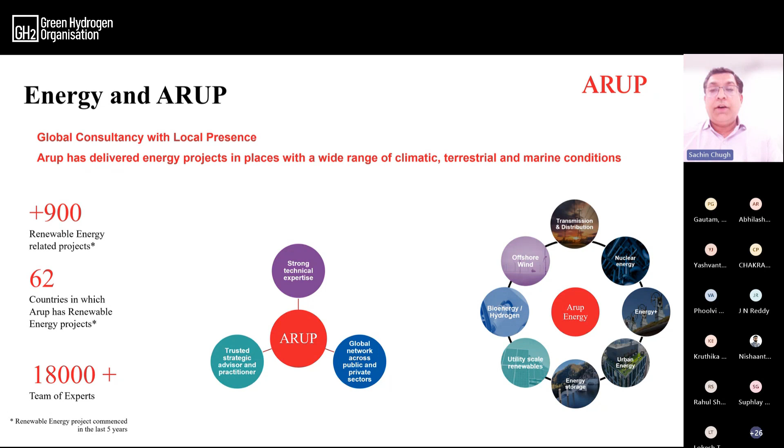If you see the entire value chain, we are into the entire spectrum of energy, not only hydrogen but other forms of distribution, including offshore wind, transmission and distribution, nuclear, and whatnot. So we are here in India to start a fresh chapter, which is going to pave the way for most of the things you are going to see and witness in the hydrogen economy.

Now, coming on to the topic, I'll be covering a few fundamentals before driving on to the engineering aspects of hydrogen. There are some properties of hydrogen which all of us have already been discussing at various forums, and I would not dwell upon these properties per se because they have been talked about a lot.

But just for a minor reference, the density of hydrogen is about 7% of water when it is in liquid form, and about 7% of air when it is in gaseous form. The energy density per se is about 2.4 times that of methane, and when we compare it in liquid form, or volumetric energy density, it's about 2.9 kilowatt hour per meter cube, which calls for a lot of compression or liquefaction if we have to transport it over longer distances.

Flame speed, particularly when we talk of the combustion of hydrogen, is 6 times more than methane. It has its pluses as well as demerits. The ignition energy is very low, therefore it requires a very small source of ignition to actually catch fire, but the flammability limits are so wide that the safety threats actually belong to hydrogen, and those have to be properly addressed.

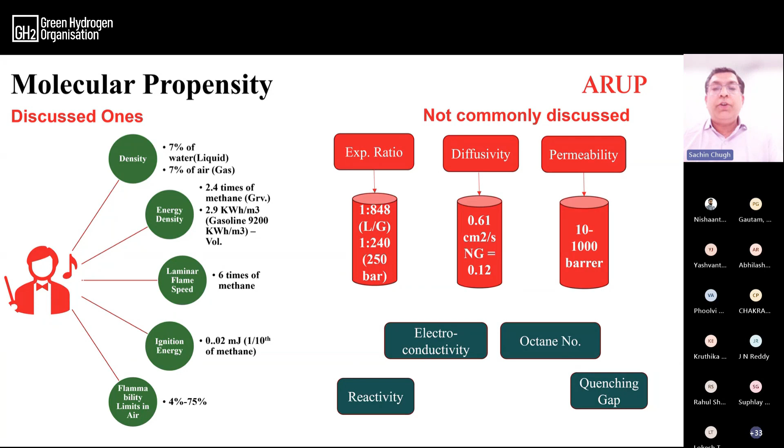It also calls for a limited range. So when handling the colorless and odorless gas like hydrogen, the role of sensors becomes very important. But the distance between the leakage point and the sensors can suffer because of this lower quenching gap, so it becomes imperative that the right planning is done before selecting spaces to install flame sensors for hydrogen systems.

So if I come to the landscape of green hydrogen production technology, electrolyzers are one of the preferred choices, and we are all fully aware of the technologies prevalent in the market - be it alkaline electrolyzers, which are the old horses as far as hydrogen production is concerned. People indicate that they have lower upfront cost, do not need any critical raw materials, and per se are quite reliable.

But yes, there are certain disadvantages, like they are not flexible in terms of load following, and they have a limited output pressure, and therefore if the end application calls for building up of pressure or storage of hydrogen, then there might be certain problems.

The PEM electrolyzers are not new in the market, but the kind of scales we are looking forward to in the industry, earlier PEM electrolyzers were not designed for those scales. But they do come up with certain advantages, like higher output pressures, and great flexibility for load following. That's where, when targeting applications other than industrial ones, like automotives, these electrolyzers are going to add much more value compared to other counterparts.

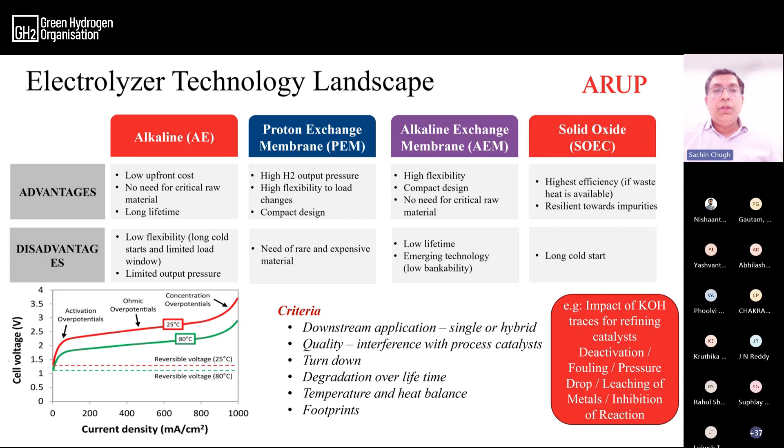Each of these technologies operate at different current densities. Therefore, the constraints in terms of availability of space are also one of the factors in how these technologies are chosen. So the choice of electrolyzer technology actually varies based on the load variation, the end process application, whether mobility is an integrated part of the complete value chain or not, the purification levels required, the degradation, and the cost.

High temperature electrolyzers are said to consume lower amounts of energy, because in this graph, the more you raise the temperature, the lower the electrical energy that's consumed in order to split the water molecule. However, higher temperature electrolyzers also call for heat demand, and if this heat is not available in the form of waste heat, then the comparison can be redrawn, so it becomes very important what the end application is.

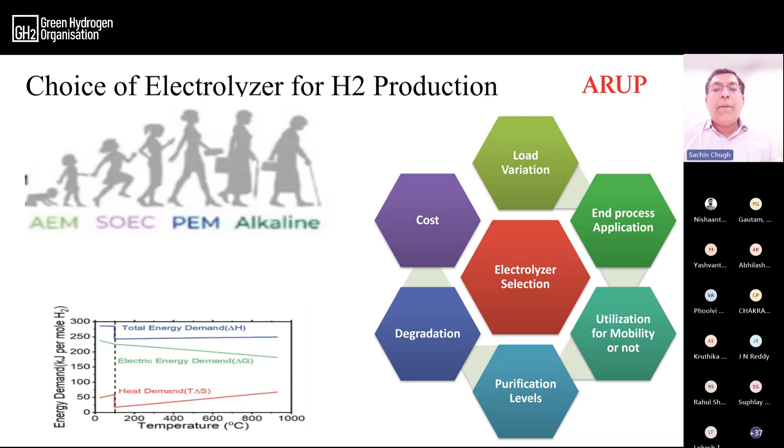So per se, the total energy consumption, which includes both electrical and thermal energy, a solid oxide electrolyzer generally consumes less total energy compared to a PEM electrolyzer. However, the higher temperature operation of solid oxide electrolyzers allows them to use thermal energy effectively, thus reducing electrical energy requirements and improving overall efficiencies.

Now coming to a deeper topic of water. I know it has been touched a lot, but when we go for the process engineering or design of hydrogen plants, we tend to ignore one side of the complete narrative, and that's what I call the water-energy nexus. The water is required to produce energy, and particularly for generating this energy, water is required. And to produce that water you require energy, because water is not available in the form in which it's required.

So when we deep dive into the complete narrative as a feedstock into the electrolysis process, this is one dimension, where water is directly converted into hydrogen and oxygen gas. The second form is as a cooling fluid to remove the heat generated in the process. When we talk of electrolyzer efficiencies, around 70-75%, the remaining energy has to be withdrawn from the process, and that's where the cooling fluid becomes very important. There are various mechanisms for this cooling - evaporative cooling is one method, but there are alternatives such as air cooling that could also be used.

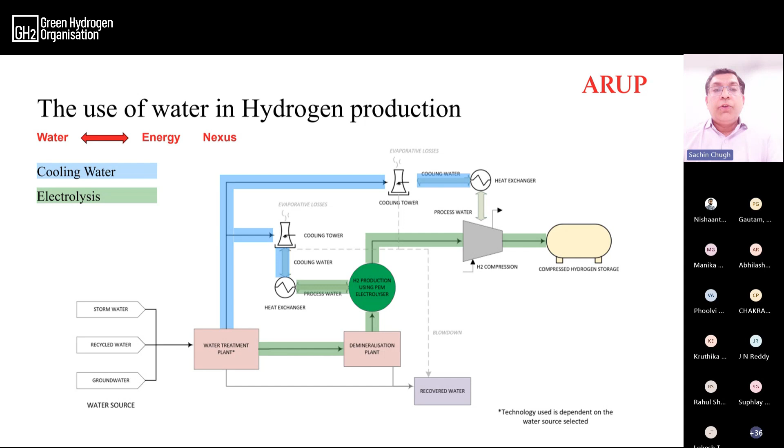And while we are talking about the policies around the world, we are not considering the additional requirements, which might cause several constraints and change the complete dynamics of project investments, resulting in under-designing the water systems. Later on, during the life cycle or operation of the plant, we may end up requiring more water because of cell degradation. And if incorrectly designed, the plant would definitely operate, but the durability is going to suffer. So this is where proper engineering design becomes very important.

Now the question is, how much water does hydrogen actually need? Water requirements are highly variable, so we cannot have a pinpoint rule that 1 kg of hydrogen would require about 9 to 10 liters of water. When analyzing the entire hydrogen value chain, we have to understand the source quality of water, the treatment method, the climatic conditions under which electrolyzers are installed, the hydrogen production method, which electrolyzer we're going to use, the cooling method, and the hydrogen carrier conversion process in case we're translating or deriving derivatives of hydrogen, like ammonia and so on.

The main consideration has to come from the cooling water requirements, so there are multiple methods. In this particular study, we assessed three different cooling methods: once-through cooling, evaporative cooling, and air cooling, and saw that each may be suited to certain locations and climatic conditions.

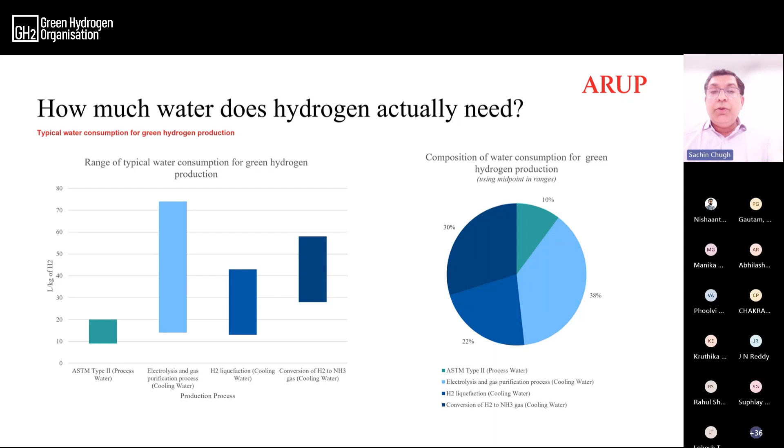Another aspect which is missing is the load not considered due to cell degradation over a period of time. So how much is that? Probably we can discuss in the coming slides.

Continuing our discussion, if we see the requirements as far as the process is concerned, the variation in the quality of the water can also affect how much groundwater would be required. This particular study is not customized for India, but we did it for Australia, and you can see on the graph that it depends upon the source of water, and therefore the energy spent on purification or desalination of water. The actual volume of water required would depend upon the raw water quality.

Water sources such as seawater require a lot of treatment, and a lot of water is actually rejected as waste. Depending upon various kinds of requirements, a minimum of about 23 liters to about 94 liters of raw water would be required.

In India particularly, if mandates come for the refining sector or the fertilizer sector as far as green hydrogen is concerned, many setups we are talking of are going to be in landlocked areas. I am assuming that hydrogen transportation is not going to happen; we are going to generate and consume hydrogen at the same location. So with so many constraints around the withdrawal of groundwater, are we thinking of transporting hydrogen from the coast, which is not a viable option, or transporting desalinated water towards hydrogen plants inside the landlocked production centers? That is a question which maybe the industry needs to answer.

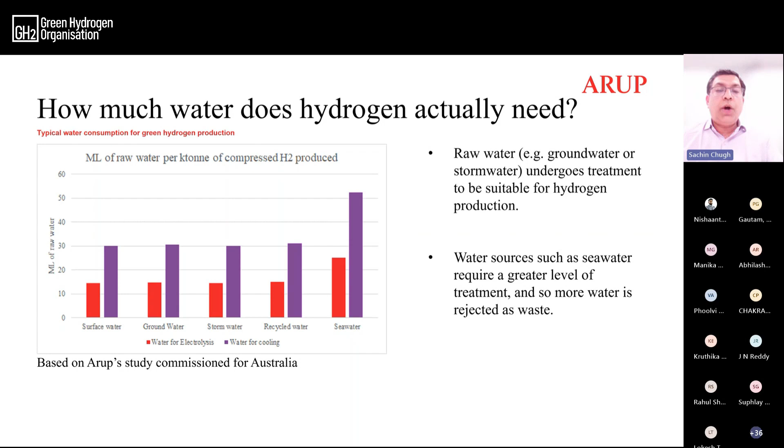Now, technologies are available, but again, what is the application? What is the cost? These are the things, and what is the durability of the complete system? These are the things we need to understand before we embark upon any such solution.

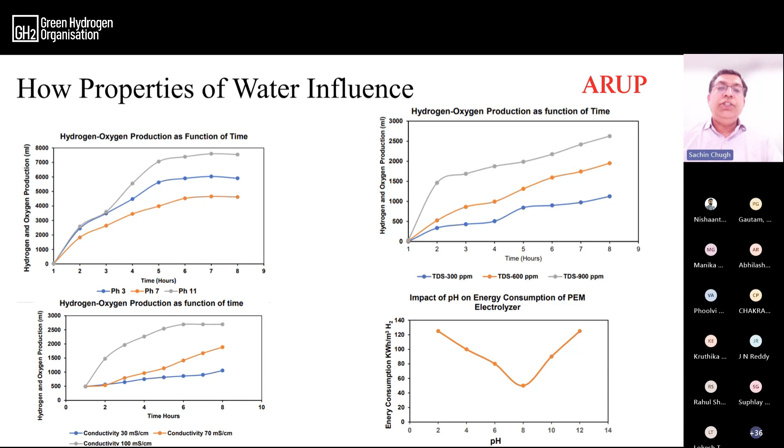How the properties vary, I'll not go into detail, but the pH levels, the TDS levels, or the conductivity all influence the durability of the electrolyzer, the efficiency of hydrogen generation, over the time span. Therefore, what appears to be correct at this stage as far as selection is concerned may not show as many favorable results at a longer date. Therefore, the right kind of interventions are needed when we are designing the complete plant.

Now, when I talk of the emission intensity, particularly how much emissions are generated out of hydrogen production, we compared multiple pathways, but I'll only be sticking to the green energy or green hydrogen pathways. When we see biomass coming into the picture, because of the net negative CO2 cycle, it appears that biomass is more favorable as far as emissions are concerned.

By the way, when you are looking at around 17.6 kg of CO2 being emitted by solar electrolysis, this particular emission intensity is based on well-to-tank kind of studies, which does take into account the mining of materials required for the solar panels, and therefore a lot of emissions are getting generated for that particular process.

But coming back to the topic, when we are considering biomass as one of the potential sources for green hydrogen, we have to see and negate the double accounting, which probably can be done because all of us are considering that biomass is going to absorb that particular CO2, or would have absorbed that CO2 during its life cycle. But when we are talking of some kind of bindings on us as far as the creation of CO2 sink is concerned, we would have accounted for those emissions at an earlier date.

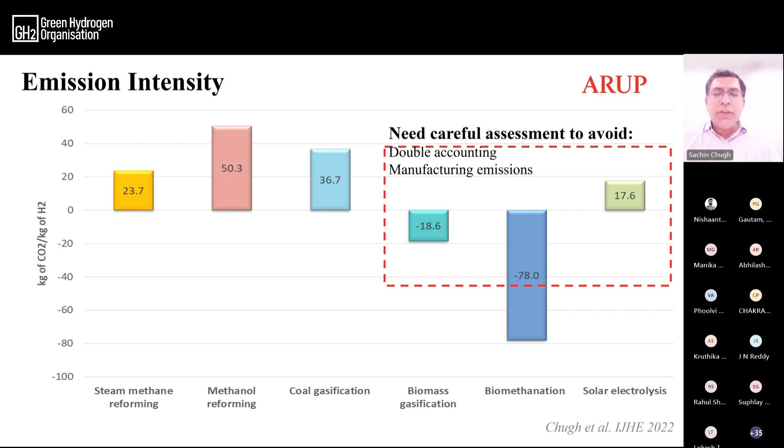And the second thing, like I discussed, the manufacturing emissions related to the production of solar panels or the mining of the material need to be considered in order to arrive at some realistic numbers.

Apart from these emissions, there are some unintended emissions, which we call fugitive emissions. Per se, these emissions have now become very familiar, very common in discussion forums, especially when we are talking of methane emissions. But I wanted to highlight a word of caution here: as far as the hydrogen industry is concerned, are we moving towards the methane way?

And why I am touching this topic is because, irrespective of any production technology revolving around green hydrogen, particularly pertaining to electrolyzers, there are cycles of venting during startup and shutdown of the electrolyzer systems. This is because they are designed to prevent the buildup of an explosive mixture of hydrogen and oxygen, as we are aware that the lower explosive limit of hydrogen in oxygen is about 4%, as we discussed earlier. And to provide a factor of safety, the hydrogen concentration is driven down to less than 25% of this limit.

So this means that at startup, any air within the cathode side of the system is vented, which is shown in this particular figure. Now, similarly, this cycle is followed during the shutdown also, just to avoid any kind of safety threats.

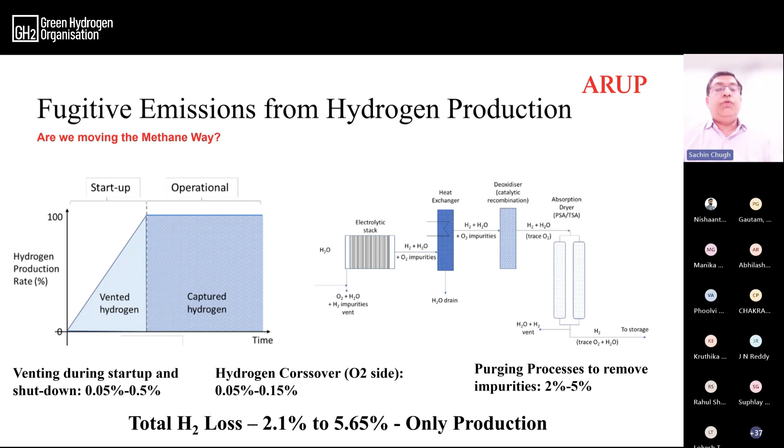So per se, if I combine these three aspects, the total hydrogen loss can range from somewhere around 2% to about 5.5% of the total value. And like I said earlier, the number may look large when we are thinking of tons and tons of hydrogen for the industry.

Coming on to the CO2 standard, which most countries are now in the process of setting — some have already done so — India also has embarked upon this, and we are right here. As per this particular standard recommended, not more than 2 kgs of CO2 per kg of hydrogen is allowed, which can qualify the so-called produced hydrogen as green hydrogen.

Now, when we back calculate this, this means considering the combination of grid electricity as well as renewable energy, this calls for about 95% renewable energy and 5% grid.

But when we see the dedicated plants, this might be possible considering the fact that there is a wide variation between the generation capacities of the plant and the installed capacities of the renewable energy. This particular number may be looked at as a little bit ambitious.

While at 2 kg we are allowed about 5% of the grid, if we increase this number to about 3 kgs of CO2 - and this is only the production number - most countries have gone with well-to-wheel numbers, which are a little bit higher than this. It makes sense to include other aspects of the hydrogen value chain, particularly when we are talking of transportation of hydrogen for export purposes.

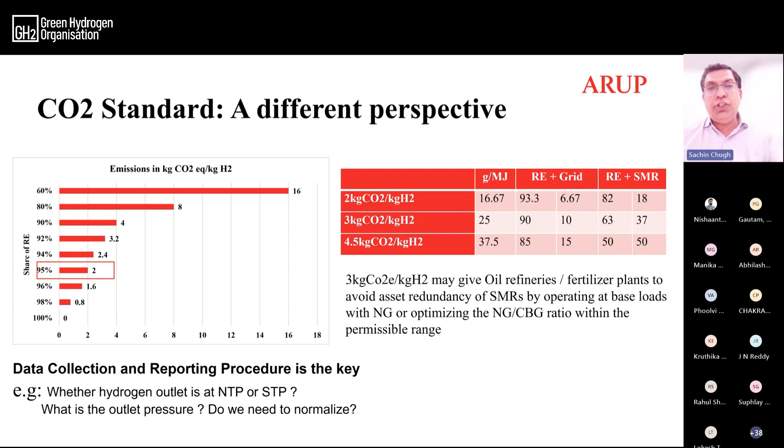There are a couple of things we need to target, and clarifications might be required on whether this hydrogen outlet is at normal temperature and pressure conditions, or standard pressure conditions. What is the outlet pressure? Because the CO2 emissions are going to change with respect to the outlet pressure of hydrogen.

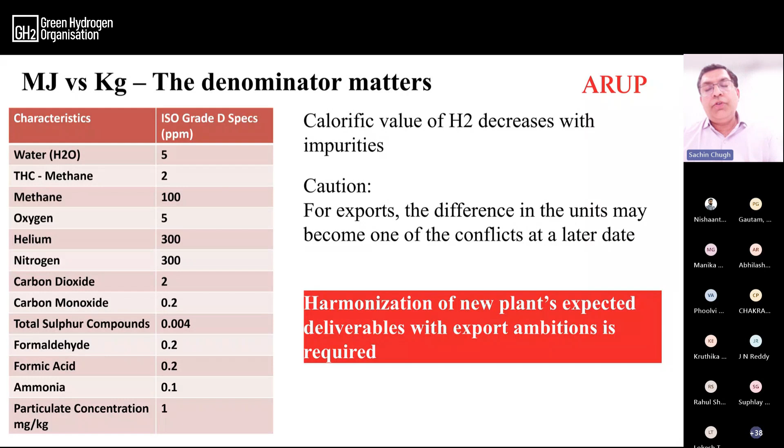So that's why I call it a comparison between megajoules and kilograms - what should be in the denominator? Because the calorific value of hydrogen decreases with impurities, and therefore we have to be a little cautious in terms of exports, because differences in the units which other countries are following may become one of the conflicts at a later stage.

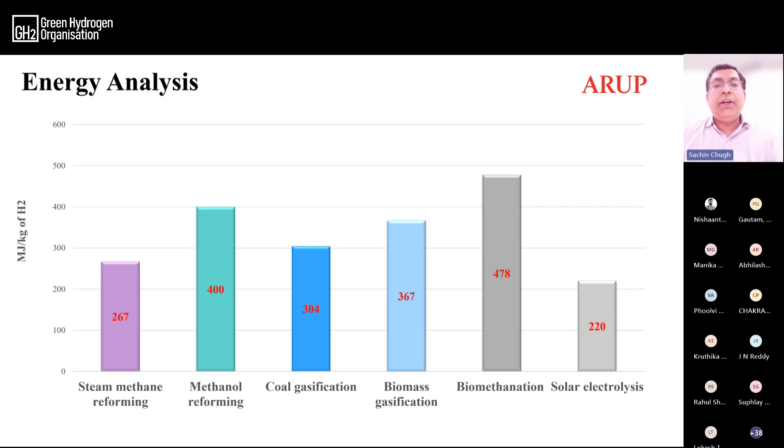As far as energy is concerned, we can see that the green hydrogen pathways are going to be very near to the blue ones or the gray ones, and therefore we need to see how seamlessly we can provide the energy to the complete system.

In a nutshell, if I dive down into the complete hydrogen value chain, we can try to analyze various criteria based on what sites are available for the production of hydrogen, the characteristics of renewable hydrogen systems, what is the correlation between the electrolyzers and the power plant and the battery energy storage systems and their parameters. Therefore, we need to apply multi-criteria analysis and then prepare the cost tool and decide the best possible algorithm.

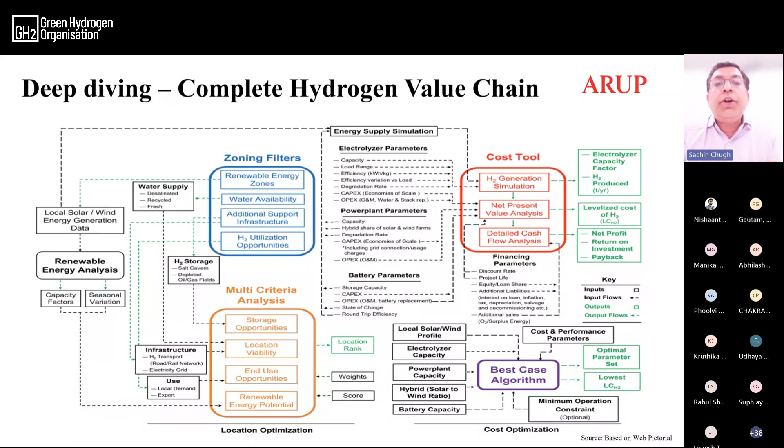And these are the kind of services, or the kind of analysis, which would be required in order to arrive at the right numbers as far as the least cost of hydrogen is concerned.

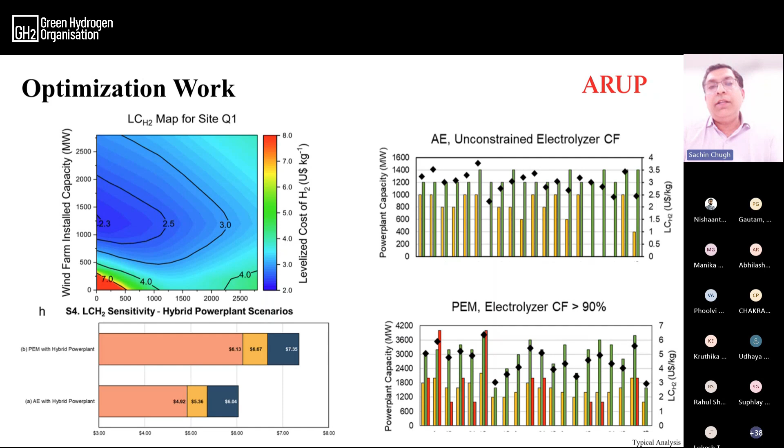Now, if we further detail the optimization work, we have multiple sources of renewable energy. There are capacity factors associated with the electrolyzers, and there can be different types of electrolyzers. So we can have different sets of numbers coming from different sets of criteria, and this analysis becomes very important, particularly considering the experience of other parts of the globe, which we can leverage while deciding the hydrogen plants for India.

Meeting the ends - again, if the call is for production of derivatives like ammonia, we are talking of two complex systems coming together and integrating themselves. So this interfacing actually induces the variabilities which are there in the RE system and the downstream molecule production.

So therefore, dynamic models - not static ones - for process optimization over a lifetime are required to arrive at the right numbers. The customized model for stack durability, balance of plant design, and system efficiency are required.

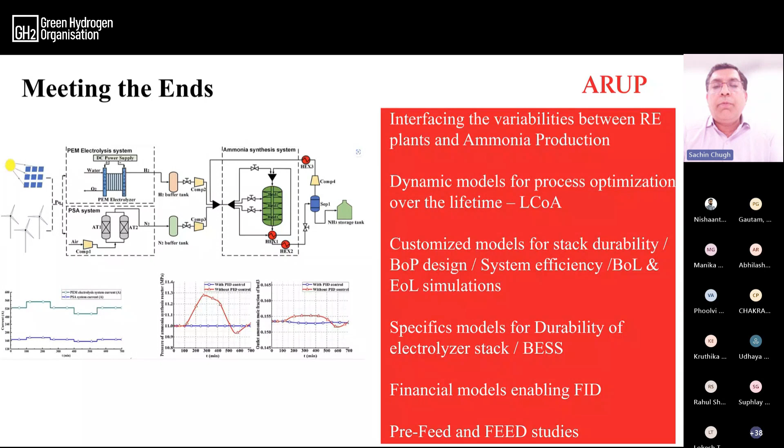The beginning-of-life performance of the cells and the end-of-life performance of the cells are going to be hugely different. These kinds of criteria should be there, and specific models of durability of the electrolyzer stack and the battery energy systems are required, which can lead us to the right FID numbers, making the financial decisions, followed by the pre-feed and feed studies.

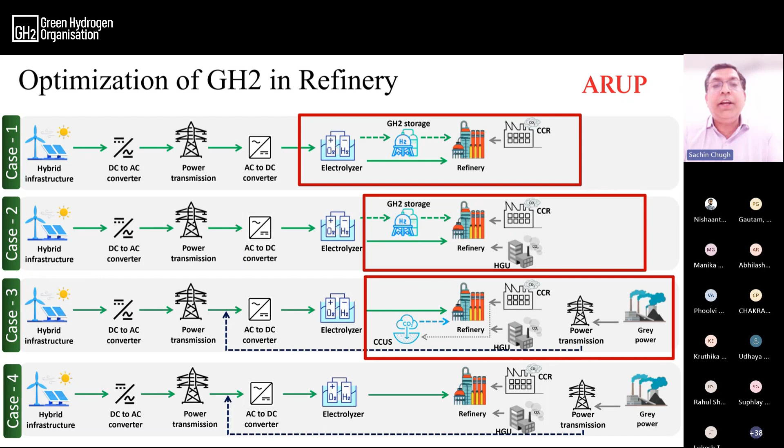So particularly in refinery, I talk of multiple cases, multiple scenarios. Those have to be properly understood when we are targeting the integration of green hydrogen in the refinery, and see how the process optimization can take place, as far as the resource optimization can also take place, leading us to the least cost of hydrogen.

So in a nutshell, some of the risk factors which are automatically associated with the hydrogen plant include water purification and management, the variations around those things. They constitute the technical risks, the power management, the variation in the performance of the electrolyzer stacks, thermal management, and the gas processing.

Combined, all these risks are going to have a lot of impact on the final project cost, and therefore some judicious decisions are to be taken with the right kind of discussions and consultancies.

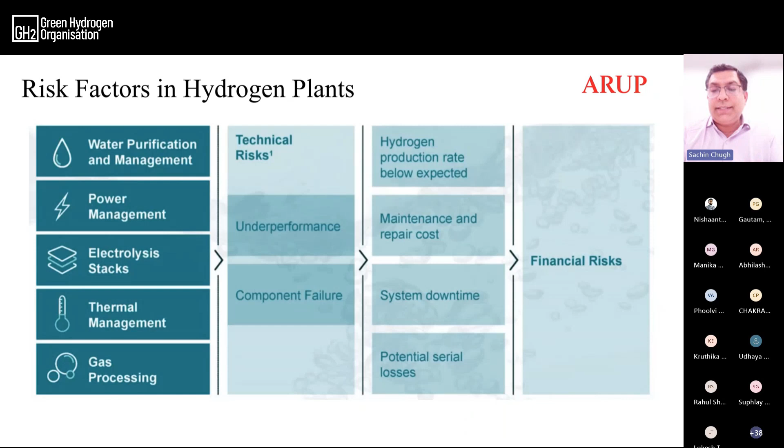So why do we need this accurate analysis? Because of the simple fact that there are two aspects to it. One is the capex and the opex, and we all know that the opex particularly influences the cost of hydrogen in a much larger manner. But is it so difficult to analyze it? Can a simple tool do it?

Our experience says that when we are scaling it up from something which is available at a pilot stage, the scale exponents come from experience. For example, the Haber-Bosch process, the economy of scale ceases to exist after a certain scale. We cannot assume it as a perpetual scale for deriving the economies of scale.

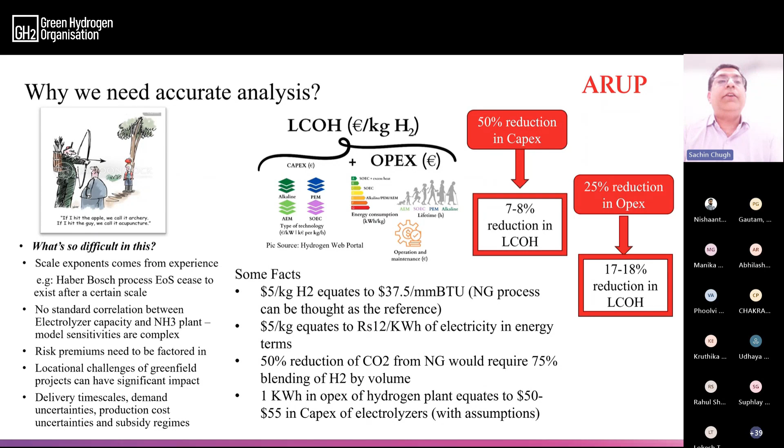So no standard correlation exists between the electrolyzer capacity and the ammonia plant. Model sensitivities are very complex. There are risk premiums which need to be factored into the complete value chain. The locational challenges of greenfield projects can have significant impact on the projects and delivery timescales, demand uncertainties, production cost uncertainties, and subsidy regimes, they are all going to influence. That's why we require very accurate analysis as far as the operations are concerned.

So as far as the technical aspects are concerned, I'll just put forward some of the experiences which we carry as ARUP across the globe. You name it, and we have it in terms of hydrogen requirements, hydrogen projects across the globe, and we have touched each and every facet of the hydrogen value chain, be it on the derivative side, or the transportation side, or the refueling station side.

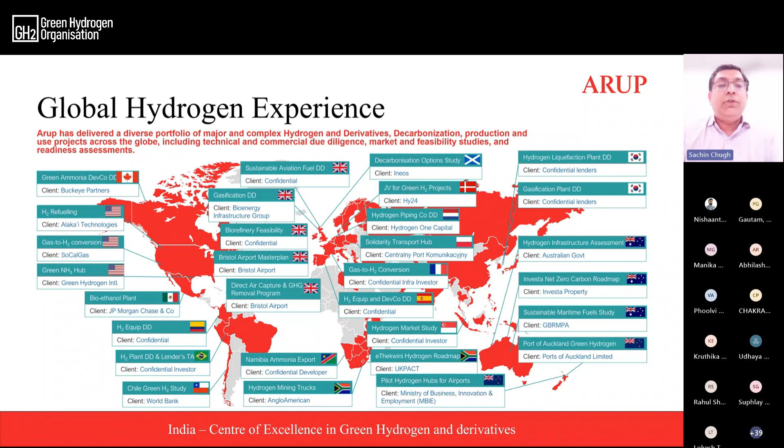All the applications linked to it, like carbon capture or direct carbon capture, or the production of synthetic aviation fuels, or green ammonia and green methanol derivatives. India per se is going to act as the center of excellence in green hydrogen and derivatives for ARUP, and we have had the experience of touching each and every aspect of the hydrogen value chain through multiple projects revolving around hydrogen hubs.

Ammonia production and infrastructure, leading to its transportation and exports, ammonia storage, sustainable aviation fuels, green steel, again e-methanol and carbon capture and utilization technologies, leading to the application side of mobility, assisting clients with gigawatt factories, setting up gigawatt factories, undertaking a lot of techno-economic studies as far as automotives are concerned.

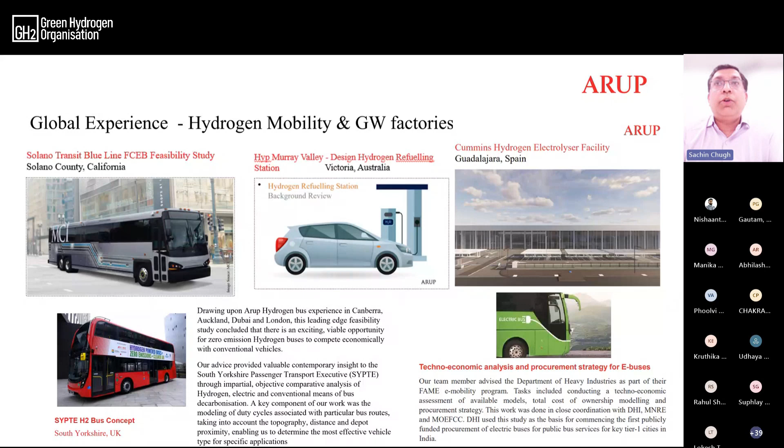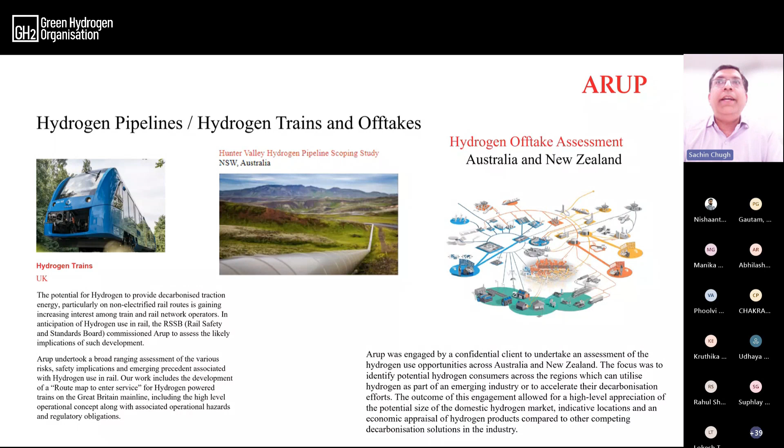And leading to the hydrogen pipelines, the transportation of virgin hydrogen or blended hydrogen in pipelines, existing pipelines as well as new pipelines, hydrogen trains, and guiding and navigating clients for designing offtake arrangements in order to have minimal risks involved in the complete process.

So I'll just pause here and invite all the questions from the audience. And once again, thank you very much for your patient hearing.